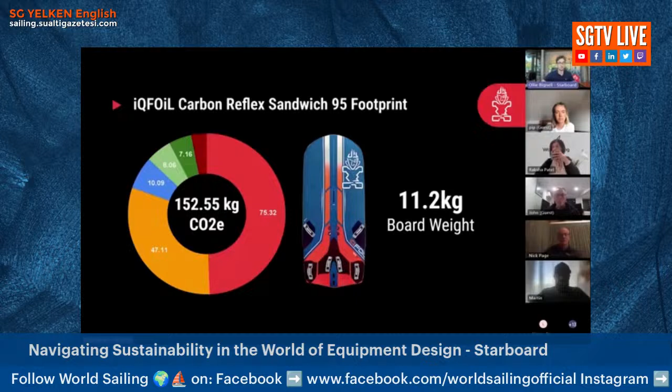Then we work with our partners, Worldview International Foundation, to turn negatives into positives, planting VCS certified trees in Myanmar to offset that impact 10 times over. This roughly equates to 22 mangrove trees for every IQ Foil board sold. We also calculate the emissions from all competitors' and officials' travel, as well as any motorized vehicles we use at the IQ Foil events, to offset these 10 times over. We call this 10 times climate positive.

But we don't stop there. We also understand the impact of the plastic materials used in our boards and their contribution to the global plastic pollution problem. Whilst we've shipped all of our boards in plastic-free packaging since 2017, we also work to collect plastic in Thailand and Myanmar equal to the weight of each IQ Foil board sold, supporting local communities and cleaning beaches. Now, all of these projects are excellent ways of creating positive impacts on the people and planet around us.

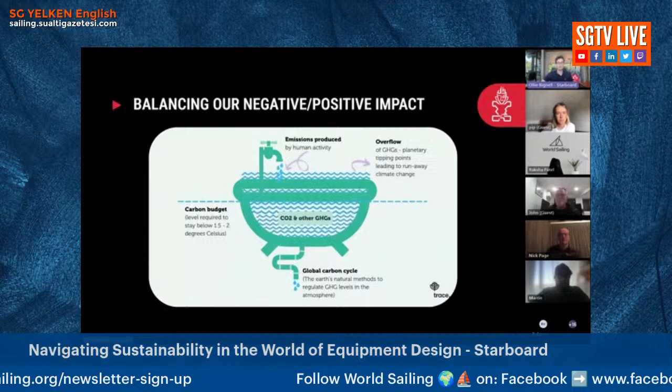However, we look at our overall impact like a bathtub. We turn on the tap, it fills up with water until it overflows. If we pull out the plug, we can stop the water from overflowing, which is a great solution to avoid catastrophe - that's what we relate our positive impact work to doing. But we also need to turn off the tap at the source to stop the problem. That's what I'm going to be talking about today.

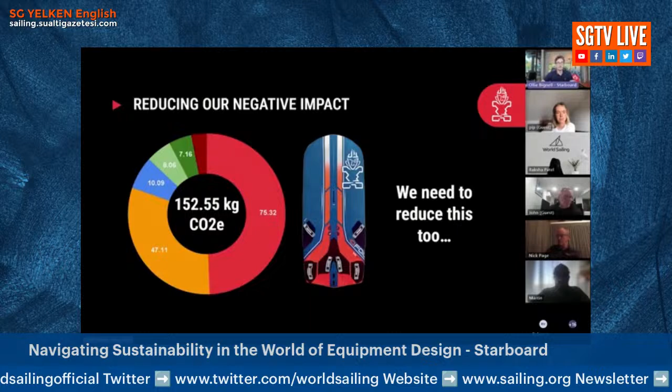Starboard is doing an absolute ton to create positive impact from its activities, but in parallel, we're also working hard to reduce the impact from our products in the first place. When we look at the easiest measurement of environmental impact, which is our carbon footprint, for our IQ Foil board for example, we can see that almost exactly half of that comes from the materials we use in the board's construction. That's exactly what my role focuses on.

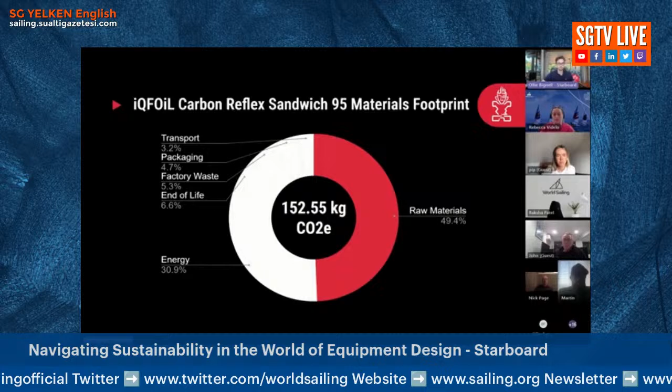In keeping with the goals of sustainability for the class and for the sport, we've used the IQ Foil and its committed shape as a platform to experiment and innovate in sustainable design and materials. Today, I'm going to talk a little bit about our latest concept boards, our process, progress, and our plans for the future.

Now, our journey began with carbon footprinting - that's something we already did to ensure our 10 times climate positive claims for the IQ Foil events. But in this project, we completely overhauled our process and onboarded MarineShift360, which is a tool to help simplify the lifecycle analysis process for us. I think you've heard about them in previous World Sailing Sustainability sessions. If you missed that session, don't worry, I've got you covered.

What is a lifecycle assessment, or LCA? It's a methodology or tool used to assess the environmental impacts of a product, process, or service throughout its entire life cycle, from raw material extraction all the way to disposal or recycling.

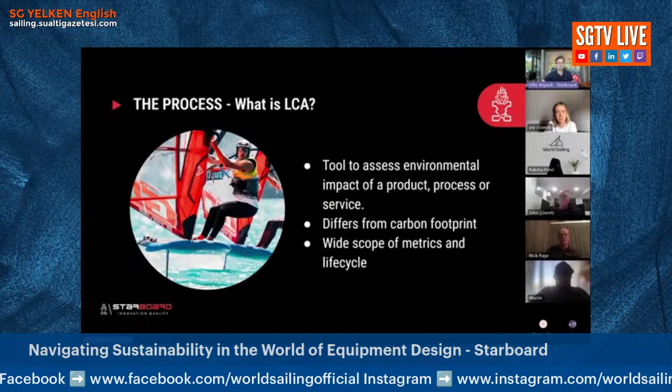A carbon footprint, as we did previously, is generally a key part of an LCA. But overall, an LCA considers a much broader range of environmental impacts and examines the entire life cycle of a product or a service. So why do we start with an LCA for our products?

Well, this analysis allows us to see the board in a different way. Just in the same way that our product team have programs and tools to analyze the shape of the board and look for areas for improvement, we use this tool to identify environmental impact hotspots and compare the impact of using alternatives.

From this point, we're able to inform decision-making from the design stage and really integrate these considerations into the design process. Lastly, this gives us a consistent scientific basis for our claims, especially on their environmental performance, as well as measuring our own progress in making those improvements.

Now, for our LCA, we use MarineShift360. I think I can see Ollie Taylor in the chat there. He is from the MarineShift360 team.

We work closely with him, and it's a tool designed by 11th Hour Racing and Anthesis to help boat builders specifically and sports equipment manufacturers easily understand the impact of their production. I know it's already used by the Ineos Britannia and SailGP GB team for their boats and how they announce this. And we use it for all of our boards to understand, reduce, and offset their impact. It has an easy to use interface like this, and we absolutely love it.

Now, one of the benefits I mentioned earlier from using a lifecycle analysis tool instead of a carbon footprint is there's a much broader scope of impact from metrics that we are able to assess. With MarineShift360, there are 5 key areas covered in our assessments, and they are all considerations for us when we're trying to design for a lower impact.

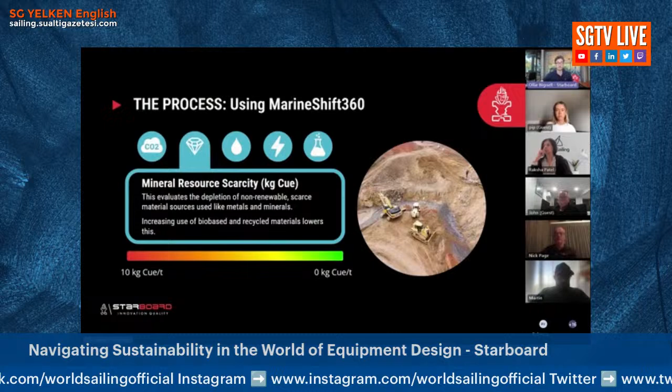The second factor we consider is mineral resource scarcity. And this assesses the depletion of non-renewable, finite and scarce resources like metals and minerals. It's a really great indicator to understand sustainability of a material's feedstock. This analysis considers extraction rate and yield, the reserves available globally, as well as the environmental impacts of the mining activities themselves. Now, in order to equivalent this between different materials, we measure it in kilograms of copper equivalents.

Thirdly, we have water consumption. And this assesses the amount of water used at various stages of production, including raw material extraction, processing, cleaning, and considers not just the quantity of water, but also its potential impact on local water sources around it as a result of those uses. We measure this in litres, very simply.

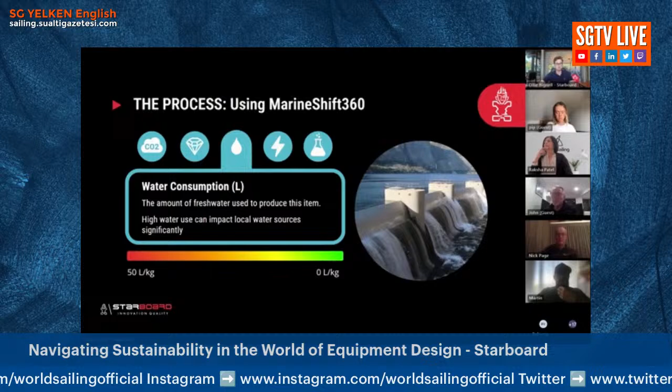Energy consumption. This is another factor we consider, and it assesses the amount of energy used or consumed during the production of whatever it is you're producing, including electricity, fossil fuels, and renewable sources. It evaluates the energy efficiency and the environmental impact of that energy generation, and we measure this in megajoules.

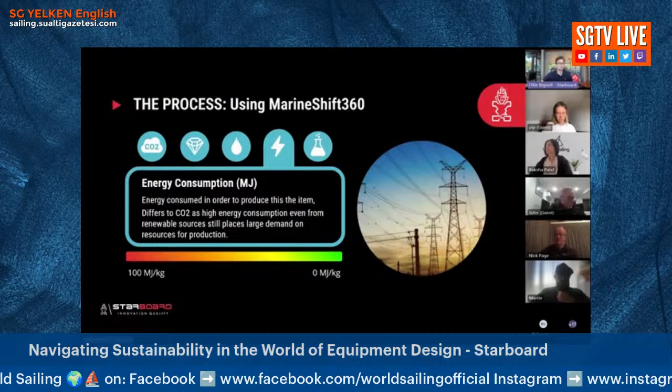Lastly, we consider marine eutrophication, which is the nutrient enrichment of aquatic ecosystems. It's a huge problem in waterway pollution and leads to algal blooms, oxygen depletion, and overall ecosystem collapse, where flora and fauna in these ecosystems are not able to get enough oxygen due to overstimulation of the algae in these waterways.

So broadly it evaluates the release of nutrients such as nitrogen and phosphorus in manufacturing activities. Really important point to consider. And we measure this in kilograms of nitrogen equivalent.

So that wraps up our environmental considerations and metrics that we gained from our life cycle analysis. But we also have to, as a business, consider some other factors as well.

Now, firstly, we need to consider durability. We have to consider that our customers are going to receive quality products that last as long as possible. Something can be as sustainable or as environmentally friendly as possible, but if it doesn't last a long time, you end up with what I call the paper straw fallacy. You use the straw and it falls apart straight away and everyone thinks it's terrible.

Secondly, in order to be competitive, as well as to have high performance equipment, we need to make sure that our boards are light. Customers are less likely to buy into environmental performance if it means that their experience on the water is less fun.

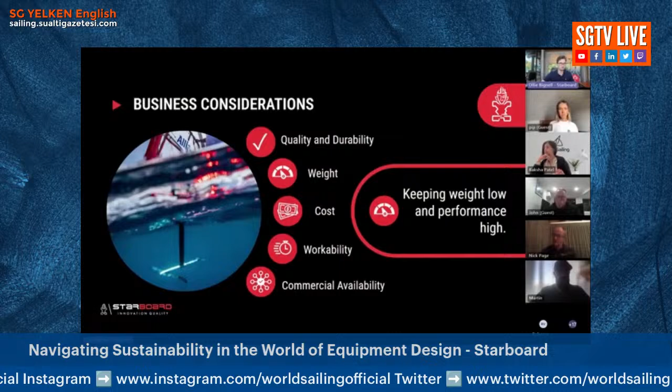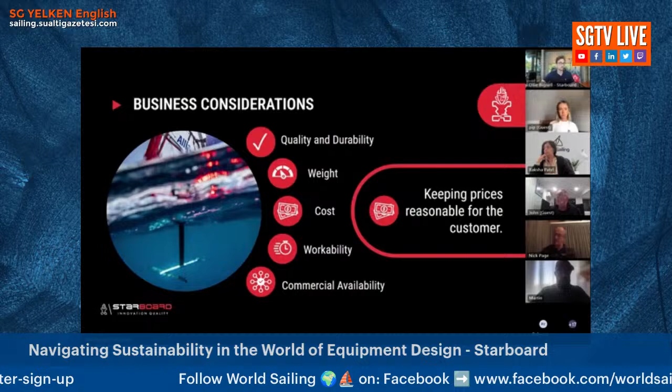We also have to make sure that we are financially sustainable as well, and so cost is always a consideration. We need to, when looking at environmental design, keep our costs as similar as possible to ensure that the price stays the same for the customer. A huge increase in price is not going to lead to a happy customer.

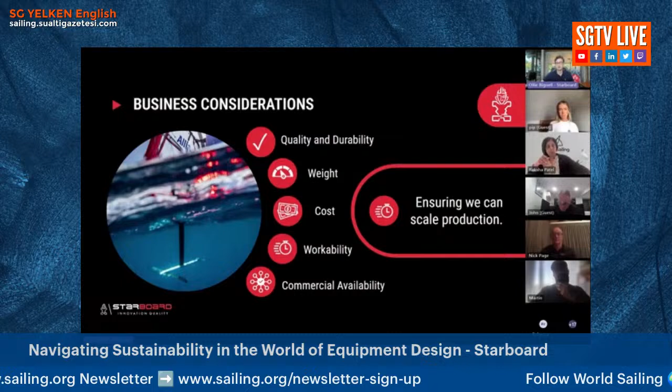We also need to ensure that we can scale our production, and workability is really important for us to make sure that we're able to manufacture products at scale. We don't want to make one sustainable board, we want to make 1,000. So we have to make sure that the materials and processes we consider in design are realistically possible for this to happen at scale.

And lastly, we have to look at the commercial availability of what we're using. There's an absolute ton of sustainability or environmental focused materials or processes out there, and they all claim all sorts of awesome benefits. But we need to make sure that they're actually available on the market, out of the lab phase, and at an industrial scale, so that when we are producing these boards, we don't run into any supply issues along the way.

Now, looking at sustainable board design and navigating sustainability in this area, normally we would follow what was done before and use the same materials and same processes, and then consider the environmental impact after. That's where a lot of people are at with their environmental considerations, only making small adjustments where they can after the fact.

But this time, onboarding a new system to analyze the impact and make decisions from the design phase, we're able to think about environmental impact from the ground up, taking into consideration all of the metrics we just discussed.

Our recent R&D journey has had three key goals for improvement. The first is reducing our carbon footprint. In line with the Paris Agreement, we need to lower our CO2 emissions in order to hit our targets for net zero.

Second, we want to improve the recyclability and end-of-life solutions for our boards. Landfills are filling up. Many EU countries are limiting what is allowed to go into landfill, especially for fiberglass-based and composite materials. So we have to consider how we can find better solutions for the end of life of these boards when they do break or are out of date.

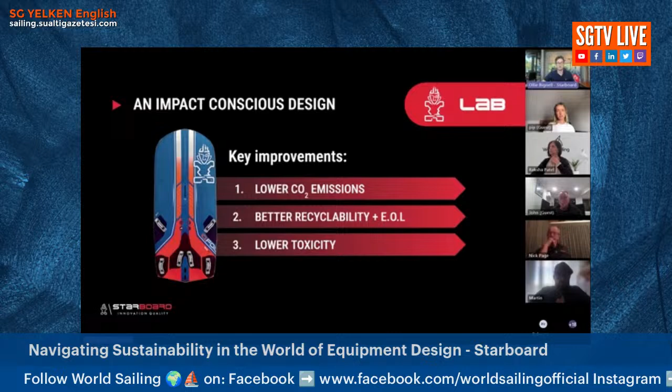So that concludes the overview of our process and how we approach design and how we got to this point. Now I'm going to talk a bit about the progress that we've made along the way.

So when we set out to lower our carbon dioxide emissions, we broke down the emissions of each board by material. For the IQ Foil, for example, we found that over 40% of our raw material emissions come from carbon fiber alone. So hitting our first target, the goal was clear: we need to reduce our reliance on carbon fiber and find a lower CO2 alternative.

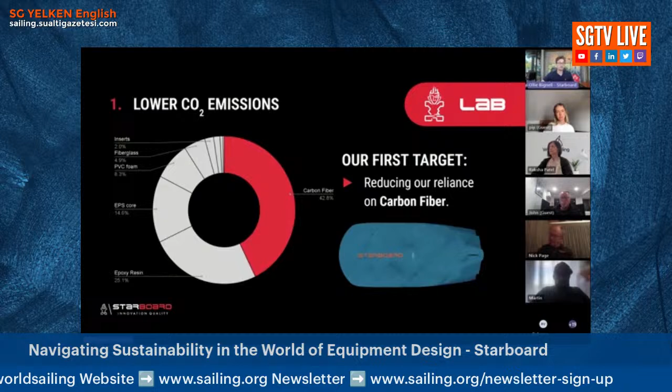We use this material a lot in our high performance boards because it's very lightweight and high strength, but it's something we need to balance with environmental performance. Carbon fiber is often regarded as a material at the heart of performance and makes up a significant chunk of an IQ Foil board's emissions due to its high environmental impact across all of our metrics. In almost every metric, it has a significantly higher impact than almost any other material we use, literally being off the charts in some of the analysis we've done with other materials.

To look specifically at why the global warming potential value for this is so high, the carbon dioxide value is so high, we have to look at the processing required to manufacture such a high performance synthetic material. It takes at least 9 key steps or processes in order to take carbon fiber from its raw material, which originates from natural gas and crude oil, to its final form, able to be used in one of our boards. Each uses specialized energy intensive machinery and requires transport to each facility along each step, all adding to the global warming potential of the material.

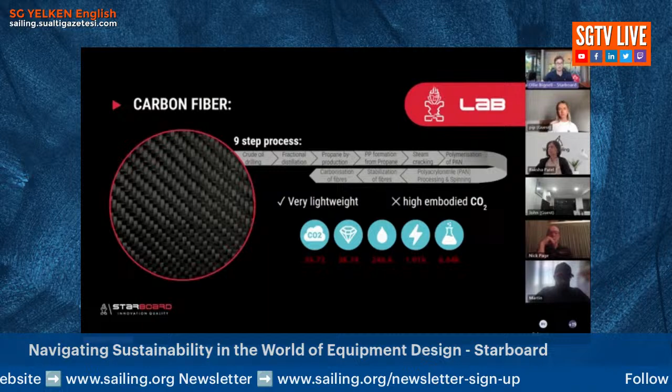Now, when we researched this, we realized that there was a common factor between highly processed synthetic materials and high global warming potential. So when we were looking for alternatives, we set out to find a material that required far less processing. After a significant amount of research and trials with different materials, we landed on basalt fiber.

Basalt fiber is a natural mineral fiber derived from basalt rock. In our lab tests, we found that it can just about keep up with carbon fiber in a lot of our applications. But it has significantly less processing steps, which ultimately leads to a 98% decrease in the global warming potential, or carbon emissions, for every kilogram of basalt fiber used compared to carbon fiber, which is absolutely astounding.

On top of that, it's also incredibly easy to handle, and as a naturally occurring material, not very toxic to humans, since it's not synthetic, which is another great benefit.

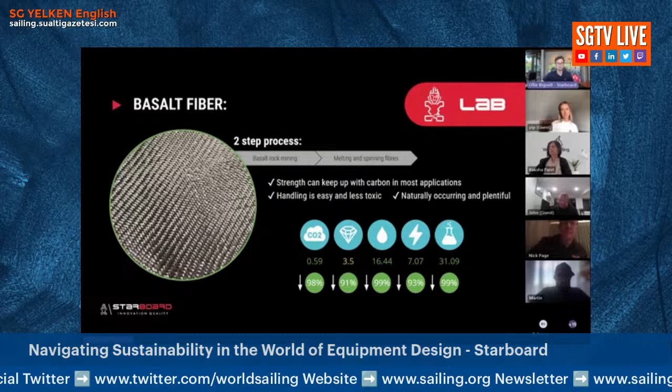Our second target was improving the recyclability and end-of-life solutions for our boards. When we put our boards together, all of our materials are bound by a resin or epoxy system. This is a strong thermoset matrix that ensures the most performance from our material, but as a result, once combined, it's incredibly difficult to break them apart. This is one of the largest limiters for recycling in composites, meaning any old broken boards are forced to be sent to landfill, which is, in our eyes, a fairly unsustainable solution.

Therefore, we knew we needed to work on the resin systems we were using and try to identify more recyclable resin systems. We made a ton of progress at the start, working with a few different recyclable resin system providers like Recyclamine, Mallinda, and Swancor, and we were able to test our ability to recycle some of the composite materials used in our boards with their solutions.

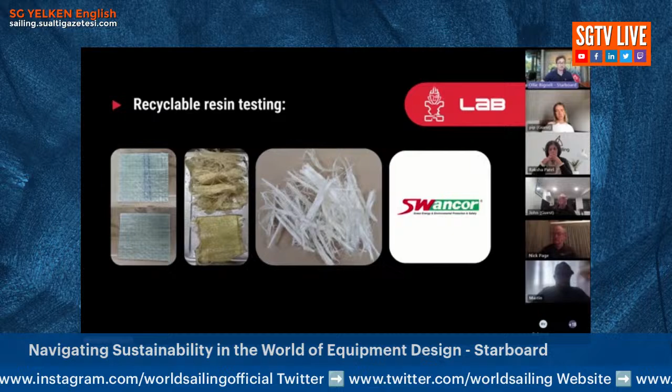The problem is that a lot of these solutions aren't at a stage where they're commercially viable for us and others to use at a production scale. The costs are quite high, and the only way we could utilize these solutions is to have a ton of custom machinery to process our boards at end of life and split those materials into their different streams, which isn't realistic given the second barrier to recyclability: logistics.

As Starboard, we distribute to over 90 countries worldwide. Investing in a solution to process all of these boards and manage the materials at end of life is a real concern, because logistics mean we would have to ship that equipment to process and break it down, and all of that can mitigate or even outweigh the benefits of recycling anyway, let alone the cost increase on our side.

That's why, for now, we are not aiming to create a perfect closed loop system - it's not realistic for us right now. Instead, we realigned our target to try and improve the recyclability of our boards using existing processes, to make them more realistically viable at the moment.

One of these processes we looked at is managed by Composite Recycling, a company based in Switzerland that can melt down old broken composite parts and extract many of the fibers for reuse, similar to the other systems, but using a very low energy intensive method that is able to move from place to place. We've been working with them for a while.

They're developing a containerized solution that we could move to event or project sites, and we provided a bunch of old broken boards to them to test. But we came across quite a significant barrier to recycling these boards every time.

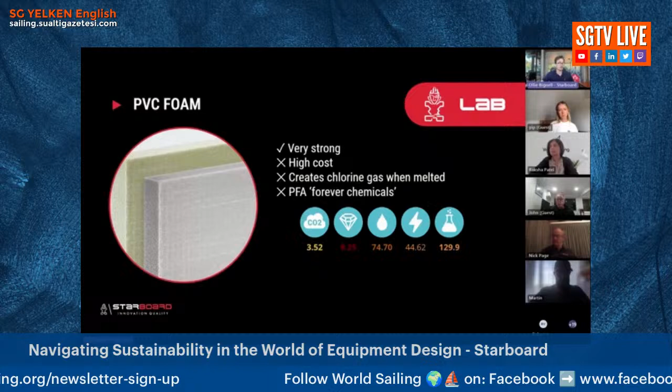So when researching alternatives to PVC foam, a lot of the time we were seeing PET foam as an alternative. You may recognize the name PET as the material used in plastic bottles.

Now, we had used PET foam in the past, but with not much luck. We knew it worked, but we didn't want to replace PVC with another virgin plastic option that didn't perform as well. So that's where we started looking at recycled PET options.

And the solution we found uses recycled PET flakes from plastic drinks bottles. Up to 45 to 100% of the material is recycled content from plastic bottles, significantly reducing the mineral resource scarcity impact by over 20% compared to PVC, given it's using a recycled feedstock.

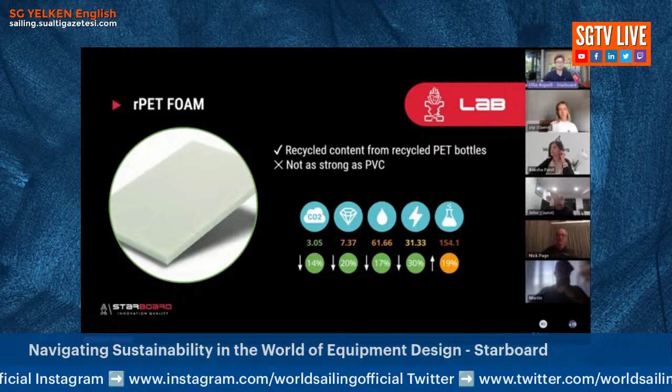Now, due to the processing required in this recycling, it also has a higher impact on marine eutrophication compared to our incumbent PVC foam, which is a negative, but we see overall that this process is a balancing act. We believe that overall this change has more positive impact than negative.

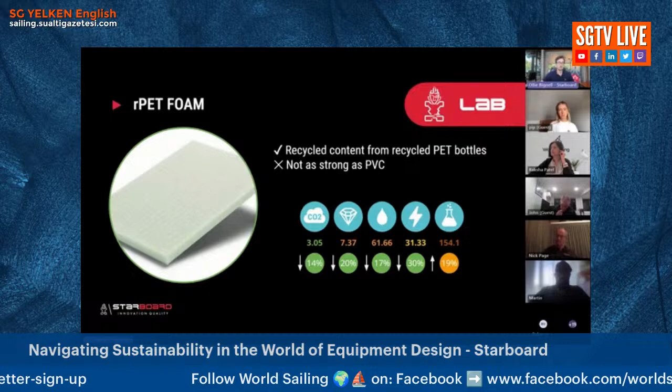The only other major downside to using this material is that it has slightly lower strength compared to PVC foam, which brings us to the discussion on replacements with alternatives.

Now, in some areas during this process, we could be easily deterred by the difficulty in trying to replace a high performance, high environmental impact material with a lower impact option that does not perform as well. Recycled PET is not going to be as performant as PVC foam.

Even virgin PET won't keep up. And that's something that the product team were reminding me time and time again. And that would be an issue if we were just looking at replacing these materials one for one.

But in this process, we're not trying to replace. We are instead trying to design around these differences and use other materials to their strengths. For example, where we knew that some of the shearing strength of recycled PET may fall short of the durability that we need and expect for our boards, we decided to add some extra reinforcement in key stress areas to make up for that.

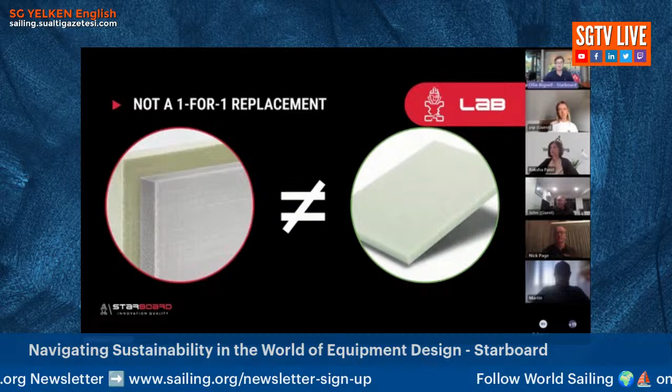However, it's not all plain sailing. It's a difficult design process. And in some cases, we do start to see some compromise here on weight in order to achieve our targets, as we're using materials that at current simply can't compete with their higher impact alternatives on a performance basis.

So lastly, in our targets, we come to lowering toxicity, which is something that we've already made progress with, switching basalt fiber out for a lot of our carbon. And this is really important for the health and well-being of our workers.

You can see in the workshop, the guys have to wear a ton of PPE. A lot of that is because of the materials we use and the toxicity of being around them for a long time. Now, one of these key materials we use is fiberglass.

And we use a ton of this in our production because it's a really cost-effective material used across the marine industry to help make lightweight, rigid structures.

However, this is, much like carbon fiber, a synthetic material that uses finite resources, as previously mentioned. It's also highly toxic to humans and the environment. Anyone who's worked with fiberglass knows how irritating it is, especially if it comes into contact with any uncovered skin.

All of our teams and anyone that works with fiberglass is generally fully covered in PPE, wearing gloves, because otherwise it can cause rashes and irritation and all sorts of other health issues. And that's why we wanted to minimize our use of fiberglass where possible.

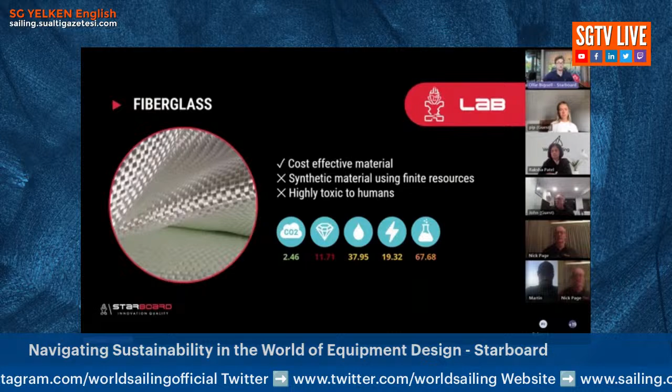One of the ways that we can do this is actually by using wood, the oldest board building material in the world. Originally, surfboards were made from wood, and so it felt really good to move back to a material like it. We specifically use FSC certified pine wood, which is derived from sustainably managed forests, where trees are chopped

down and harvested in a way that promotes forest regeneration and conservation of biodiversity. Now, this material, swapping it out for fiberglass, means that it actually has a negative global warming potential value, or carbon footprint, due to the carbon dioxide absorbed by trees during growth. It's completely bio-based, which means it's a renewable resource and breaks down naturally in the environment at end of life.

At times, it can be difficult to work with, given it's a very thin veneer material, and natural growth can cause inconsistencies. Additionally, transportation is a consideration for us, given that our wood is generally grown in Australia. However, we believe that the change is hugely beneficial to the overall toxicity of our boards, which is what we're trying to achieve here, and reduces a significant amount of the glass fiber that we would otherwise use in construction.

So, putting it all together, whilst we made some great strides with these breakthroughs in the lab, we still needed to be able to put it all together in a board and test how these materials work in a real life situation. We normally assemble all of these materials around an EPS foam core, which is actually our most used material by volume and weight.

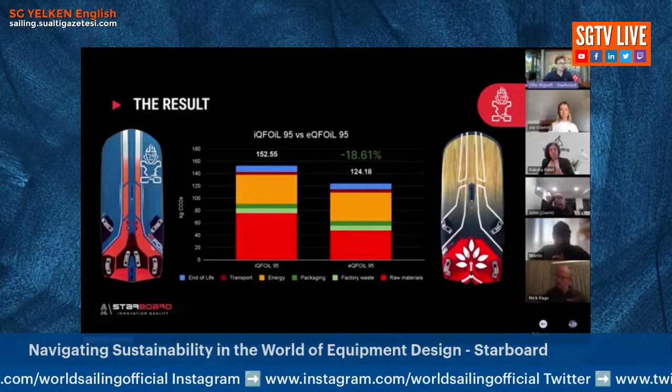Through the changes we mentioned today, as well as a few more that I haven't mentioned, this resulted overall in an 18% reduction in the global warming potential in the board's life cycle analysis, which doesn't sound like much off the bat, but when we focus in on just the raw materials emissions, which is what we've been focusing on today, we see a much greater decrease of 37% reduced global warming potential.

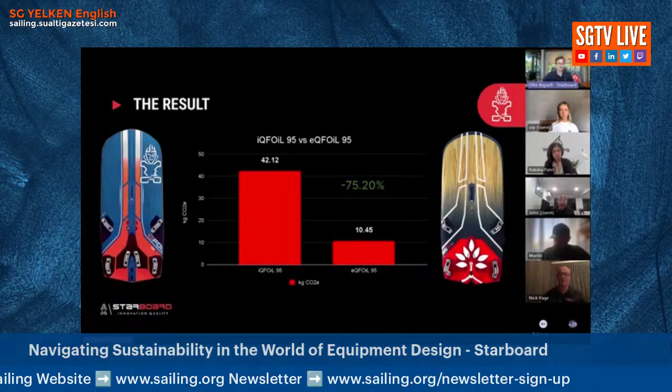Even within this scope, when we look at the areas that we've focused on today, we can see a 75% reduction in the global warming potential. Now, that doesn't include a lot of the other areas of raw materials where we are yet to make significant strides, but we hope that we can make similar progress there too. What we want to show is that we've focused on some specific areas, and in those areas we've made a really big impact.

Looking at all of the other metrics across our boards, we see that we've decreased every single metric for environmental impact across all 5. In global warming potential, it's just under a 19% decrease. Our mineral resource scarcity metric has been reduced by 14%, water consumption reduced by 10%, energy consumption reduced by 23%, and lastly, marine eutrophication reduced by a third.

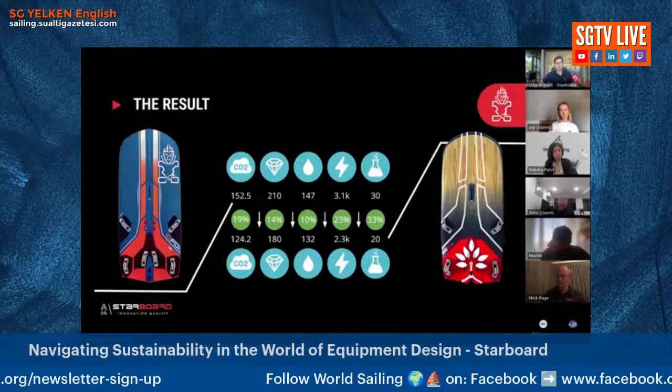Additionally, with this project, we see it as a success. We were able to hit all 3 of our key targets in some way. We lowered CO2 emissions, we improved the recyclability of our boards, as well as making some great strides in our work with other systems for the future. And we lowered the toxicity of the materials in the board, both for humans and for the environment.

However, these improvements did not come without some drawbacks. The final board behind me is around 500 grams heavier than a reference iQFOiL board, which is around a 4% increase, which is pretty significant for a racing board, especially when we consider that it's a one design class and everyone's trying to use the same equipment.

And lastly, we're still unknown on the durability of the board. We're still testing this board at the moment and receiving feedback on the feel from the rider, which is something intangible that's hard for us to design for at the start of this process. But as we gain more feedback on the materials and how they feel, we'll be able to iterate and find some better solutions.

So lastly, I'd like to speak a little about our plans for the future. Paris 2024 Olympics is coming up in just under 6 weeks. We'll start to see the iQFOiL class in action.

The team and I at Starboard will be in Marseille for the Olympic windsurfing, showing off this board and displaying the work that we've done to the industry, to show what can be done when we focus in on sustainability in equipment design. If you're around, if you're in Marseille, please do come and see us, come and chat to us. We'd love to tell you all about the board and the improvements we've made, and love to hear your feedback as well.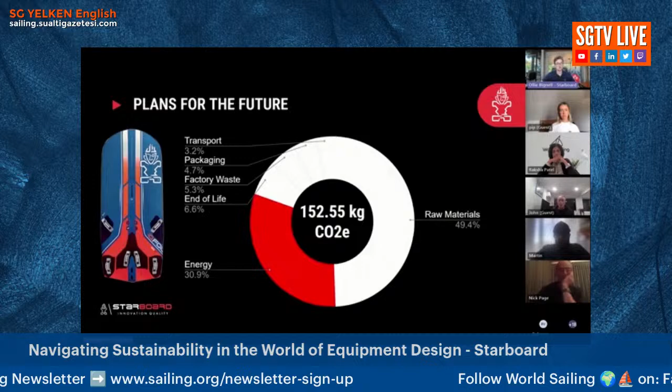Now, this already accounts for the fact that 30% of our electricity use in manufacturing comes from solar sources. But by the end of 2024, we expect that our solar usage is going to increase to just under 50%, which alone will provide an additional 22 kilograms of carbon dioxide equivalent emission saving, which is another 14%, which is significant. But making small impacts in all of these areas overall, we think, will create a much larger impact.

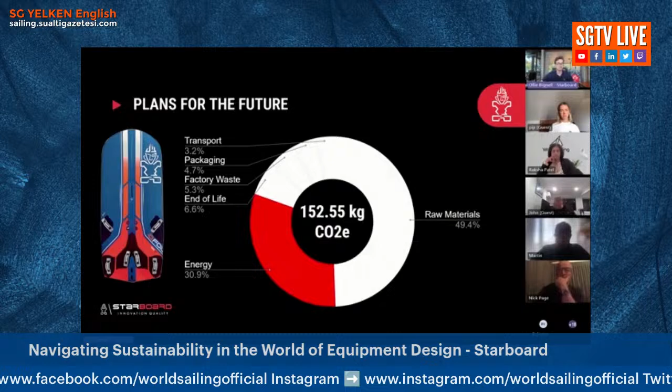Conclusions: we've seen that material design choice can significantly reduce the impact of our boards and the sustainability of our products. But there are still lots of other areas that we need to focus on to make improvements in. Using impact measurement tools with simple metrics like we have helped us understand the impact from the design phase and help us iterate from a ground up perspective.

The industry is moving incredibly fast, and at the start of this project we would have loved to have some of the materials that are available now that weren't around back then. There are always things popping up that people are sending me, saying you should use this, you should try that. I'm incredibly jealous that we weren't able to use them from the start of this process. But we'll continue to do so and include them in our development. It's an iterative process, really.

Lastly, if you're interested in navigating sustainability in equipment design, or if you're working with a class, an industry, a boat builder, how do you get started? Well, first off, what we did was we started measuring. Understand your carbon footprint. Start with carbon footprint. That's what we did. We've been doing it for a while, and it's only from there that we are really able to start pushing and making strides to reduce this impact. But before we did any of it, we were just measuring and understanding where this impact came from.